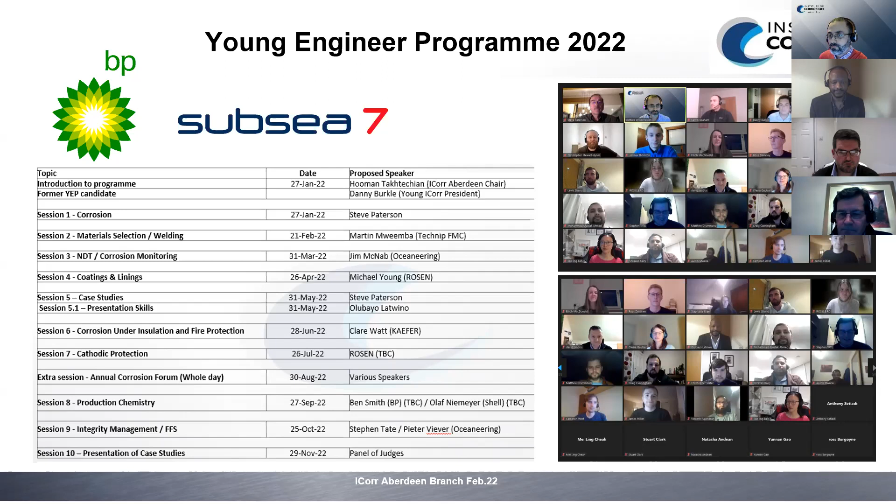But before that, just an introduction to our speaker today, and Andy, who is supporting him during the question and answer session. So Leo is a principal engineer in the production chemistry department within Intertek's production and integrity assurance group. He has worked in industry for over 13 years, working on a wide variety of oil and gas projects, including microbial souring investigations and mitigation laboratory studies, system assessment for carbon capture and sequestration projects, chemical treatment and corrosion studies for large seawater injection systems, and operational and corrosion management systems reviews. Leo gained his bachelor degree in chemistry from the University of Sheffield in 2006.

And Andy Duncan, who is a lead consultant with Intertek Production and Integrity Assurance, is a chartered engineer and a fellow of the Institute of Corrosion with 40 years experience in oil and gas, refining and petrochemical industries across some 20 countries. Prior to joining Intertek P&IA 6 years ago, he worked for BP, Associated Octel, Capcis, and the UK Health and Safety Executive, where he led the external corrosion project and the key program for KP4 on aging and life extension of offshore oil and gas production facilities. Andy is a member of the IOM3 Energy Transition Group, the IOM3 Corrosion Group, and also the Energy Institute Corrosion Management Committee. Andy is active in mentoring engineers and scientists of the future inside and outside of Intertek.

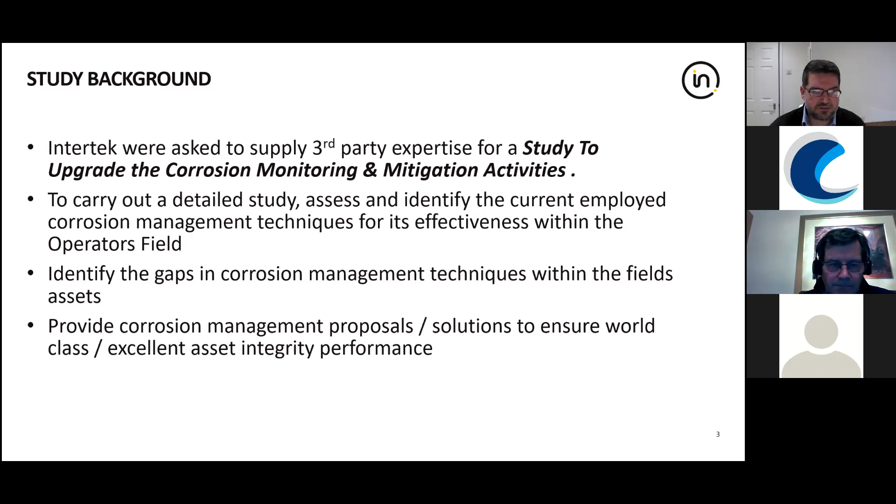The study was broken into two main sections. First was a document review, which was both desktop based in the UK and also within the client's offices. When requesting data, initially you get a large amount coming through, but we typically see in projects that getting the last few bits of data—due to different nomenclature, people referring to things in different ways—actually being in the office and doing the paper following to get that information can really help push forward the study.

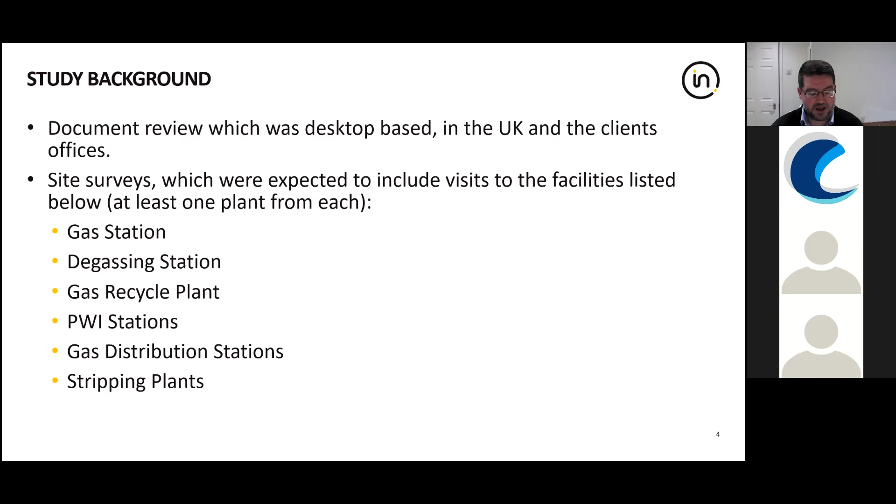There was also the site element to it. We attended various parts of the field's production system—this was a gas well, but they produce all sorts of fluids: gas, gas condensate production, as well as black oil. So a variety of different stations: gas stations, degassing stations, gas recycling plants, produced water injection stations, gas distribution, as well as stripping plants. We were looking at all of these different process types and how the corrosion management mitigation documents apply to each of them.

The wording of the proposal and the report said that the purpose of the site visit was to gain an understanding of the integrity management activities, the corrosion control monitoring and mitigation programs, and also look at repairs—as often repairs, especially temporary ones, can be implemented, and then 3-4 years later you find they're still there but listed under temporary repairs and not moved on to fully permanent repairs.

And also while on site, to determine the current and projected process conditions—that's to help determine whether the corrosion management document as is would be suitable as the life of the field progresses and the composition of the fluids, etc., changes, and to make sure that the system was able to handle any future operational conditions.

Also part of that, we needed to look at the fluid compositional data—not actually performing the samples, but to see what sort of measurements and monitoring the operator was doing on that side of things. Looking at the chemicals being dosed to address the various corrosion issues they had, and also looking at the materials of construction—making sure that what they were saying they were using was actually what was there, and in places where high alloys are used, that's actually what was in place, and that they're using materials of construction as a method of corrosion mitigation.

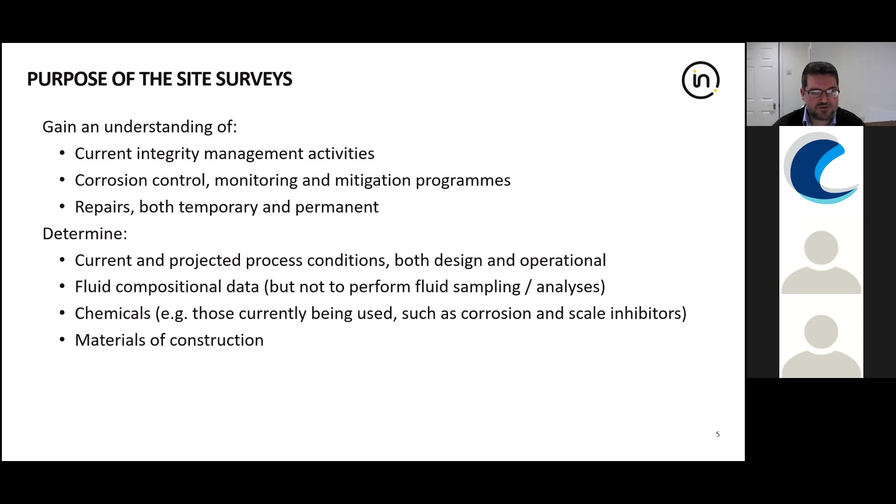That was on paper what the purpose of the site visit was for, but really the critical thing we took from the site visit was to actually talk to the operators and personnel at site. The amount of information we were looking through ultimately didn't matter if you got to site and found out that they'd never used that document you reviewed, or it's a different version, or that part of the process no longer exists. So actually getting to site and talking with the people to determine what was going on was key—on paper everything could have looked perfect, but when you get there, you can find it was very different to what your understanding was before you got there.

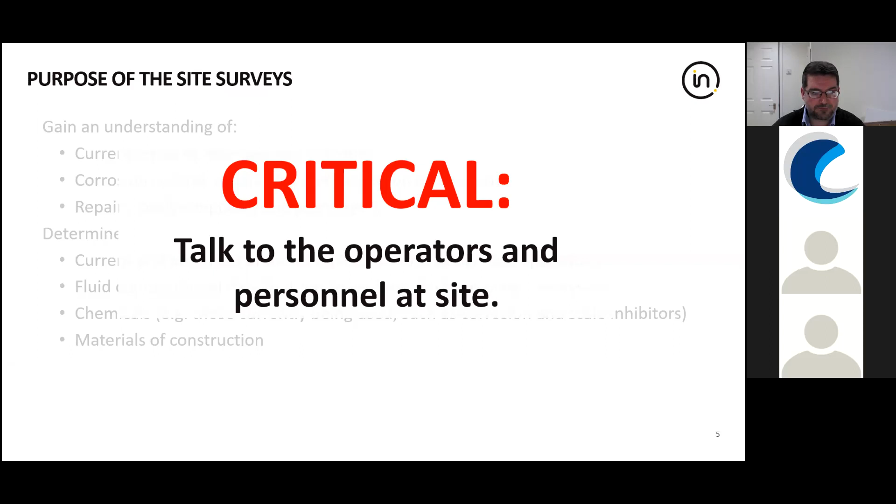So how do we go about the study? The basis of the study was the implementation of the guidance within HSG 65. HSG 65 is an HSE document which could be used to assess the effectiveness of any organisation which relies on systems, procedures and methodologies, and organisations that are required to operate in a safe and effective manner.

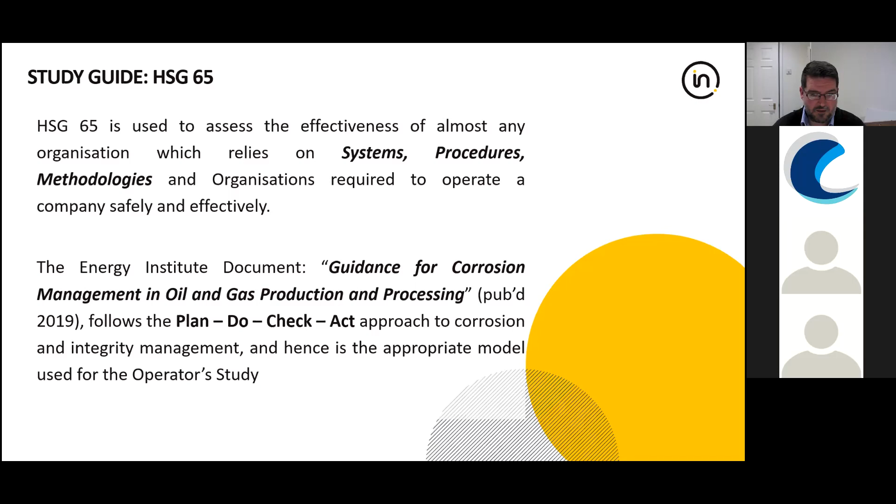This tied in quite nicely with a review of the corrosion mitigation aspects, as the Energy Institute's guidance for corrosion management in oil and gas production and processing follows this plan-do-check-act methodology, which is highlighted in HSG 65. So we looked at applying that across the various monitoring and mitigation processes that the operator did.

Starting with the planning, the input into that is first of all policies - what documentation, what guidelines are there within the organisation. This is quite high level, so the health and safety policy, company mission statements, and other corporate policies, alongside the actual planning of the action or system that you're reviewing.

So looking at what's going to be physically going on, who needs to be there, what's going to be done - so who, what, why, when, how. Planning what teams are needed, when it's going to be done, what's going to actually go, and also why - does it have to be done, is it critical that it's done at that point. A lot of these actions have a risk associated with them, so making sure that it's justified to do that action is key.

So once the plan's in place, you can go to actually implementing your plan, the do part of it. This is everything from organising the team, making sure there's nothing within the action that could be hazardous, making sure the right people are there with the right equipment, etc., and getting the task done as safely as possible.

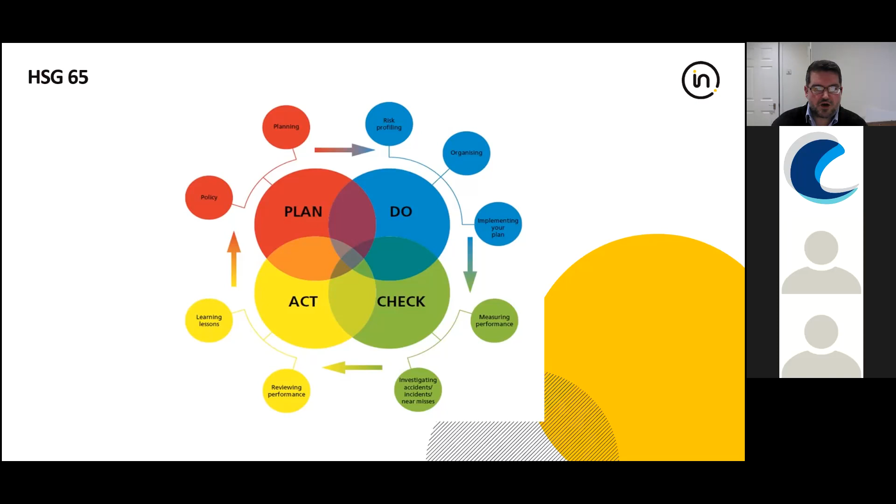So applying this to the corrosion mitigation and monitoring activities done at the operator's field, we followed the same sort of circular review. Initially a review of the corrosion monitoring and mitigation documents, and that intertwined with interviews with corrosion engineers, lab personnel, people actually doing the work.

Then we looked at the reporting practices and pathways - so what happens when they've got the information, where does that go? And then review of the higher document, the corrosion management policy, to see what the general ethos is behind what they're trying to achieve and how they're trying to do it.

So within this, this wasn't hard and fast, but to fit this into the Plan, Do, Check, Act, we assigned the overlap between the review. The do part of it was what happens when they take the monitoring mitigation plan and actually put it in the field, and that information comes from review of the documents as well as interviews with the people who actually go do it.

The check part was following discussion with the people and seeing what the results were gained and how that was inputted. The Act was based upon once the information was put into the system, how does that feed back into the corrosion management policy? And then the corrosion management policy fits in with the monitoring and mitigation documents for a plan of how they're addressing the various corrosion issues on site.

Within the study itself, there were numerous topics covered. On the corrosion monitoring side, we looked at intrusive corrosion monitoring, deposit analysis, and scaling tendency, which, while not directly associated with corrosion, has the potential for under-deposit corrosion, so that was included. Microbiological assessment looked at the potential for MIC within the system and how that was being assessed.

We looked at all sorts of different plants. Many systems had cooling water and glycol systems as well, so we looked at the quality of both cooling water and glycol. A lot of the systems were coated, and a lot operated at elevated or depressed temperatures, so much of the system was insulated. We looked at corrosion under insulation and what was being done to ensure that wasn't an issue.

We also looked at the lab procedures, documents and reporting to determine whether the sample analysis being done was supplying the quality of information needed to make decisions for mitigation.

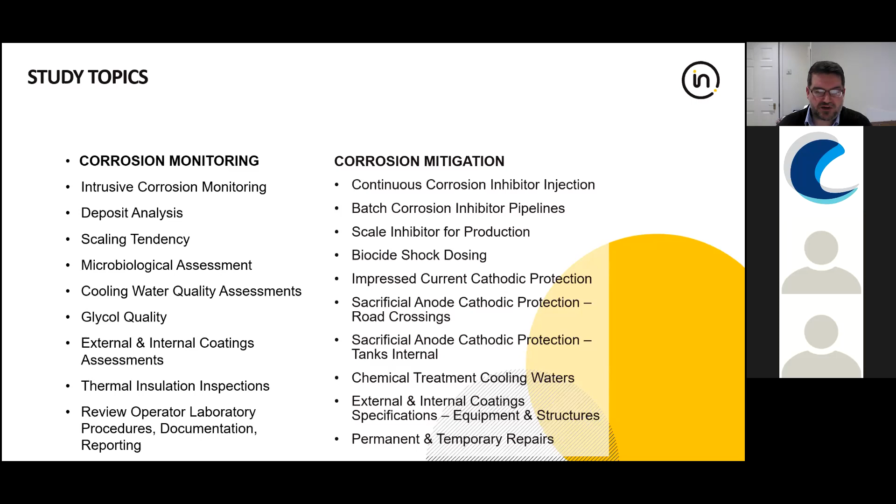When it came to mitigation, we assessed the policy for continuous corrosion inhibitor injection as well as batch corrosion inhibitor injection, and looked at scale inhibitor and biocide shock or batch dosing. We looked at a lot of the impressed current cathodic protection systems, as well as sacrificial anodes for road crossings and tank internals, the chemical treatment for cooling waters, the external and internal coating specifications for equipment and structures, and also what's done regarding permanent and temporary repairs.

These are all the topics which basically feed the technical basis of the corrosion management policy. All of these sit within the Plan part, and all the information feeds back into the overall overarching corrosion management policy. That's where the Act part of the circle feeds back in.

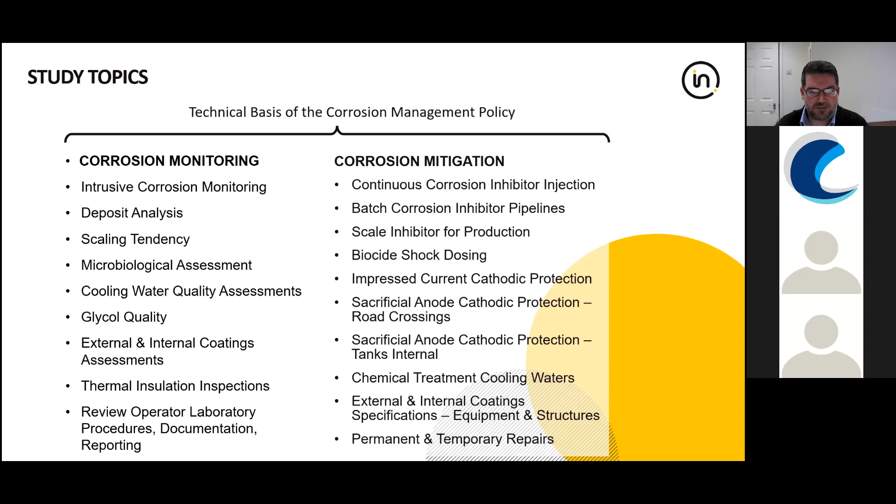So overall, the study outcomes. When we looked at breaking down the outcomes of the study, we started at a very high level and worked our way down into the individual processes and procedures the operator was utilizing. Overall, we had the traffic light system: green meets the standard, amber needs improvement, and red means significant improvement is required.

Starting with the overall planning aspect, a lot of the procedures and policies were good. There were some technical and documentational improvements required, but overall it was a good standard.

The Do part of the implementation: overall, all the staff were professional and delivered in a timely manner. However, a lot of the actions were taken on calendar-based schedules, with no risk associated with what they were doing. So inspections, etc., weren't done on a risk-based schedule.

Going on to Check and Act, both of these overall needed significant improvement. Once they planned what they were doing, they went out and did it, but after that the information or review stopped there. The information was uploaded to spreadsheets and databases, with no further follow-on from that.

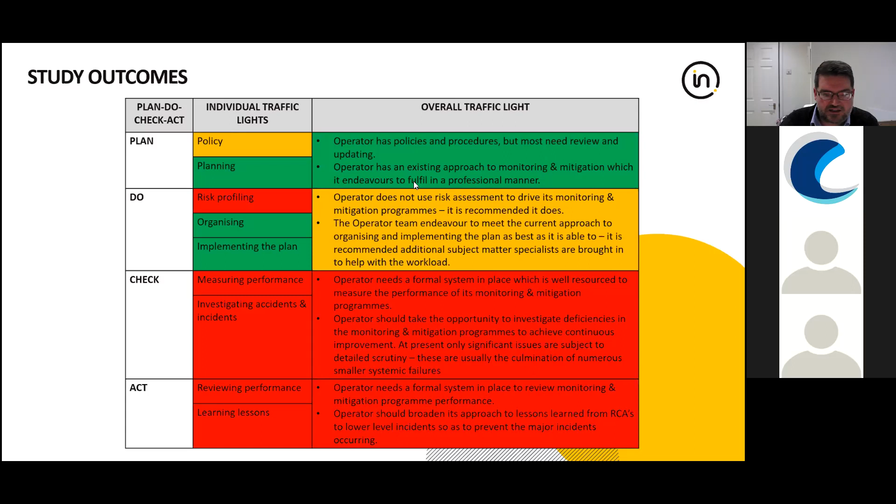So to say, with regards to corrosion monitoring and corrosion mitigation, there were numerous topics which we looked at addressing, but for the next few slides I'll just focus on two of the corrosion monitoring and two of the corrosion mitigation. So look at the intrusive corrosion monitoring, ER probes, corrosion coupons, etc., and the external and internal coating assessment.

And then for the mitigation, we'll look at the differences between the application of continuous corrosion inhibitor versus the batch corrosion inhibitor that was deployed at the site.

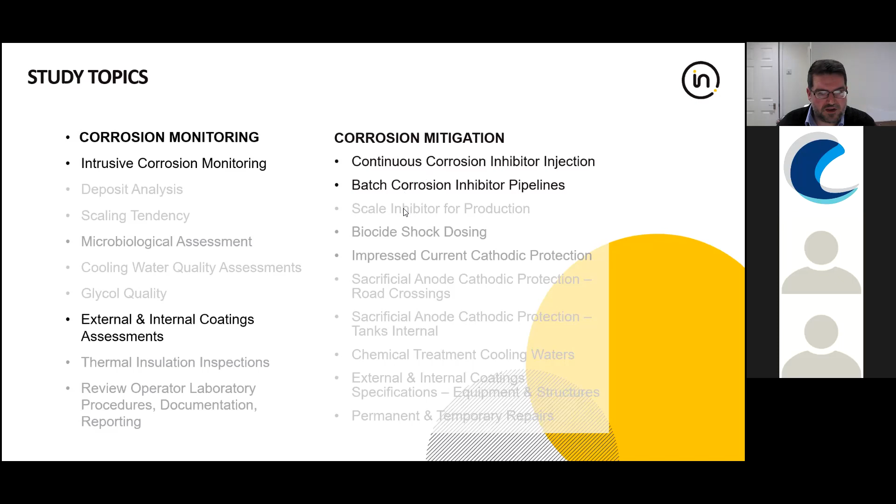So for corrosion monitoring, again the planning and the doing - in this case the check part of the program was there. The planning part was overall well done. There were well-written standards, overdue for review, with some minor technical errors.

The planning for the retrievals and probe readings were well planned. However, a few minor things: there was no tag numbers on the intrusive corrosion monitoring points in the field, and there was a lot of data knocking about on various systems. There was no centralized management software.

And again, the risk profiling - in every topic that we reviewed had the issue that it wasn't based on risk, it was just based on opportunity or a calendar basis, so there's potential to optimize the retrievals. But overall, the organization was very effective, and the implementation of the plan was very effective.

But there was a need for a central support function to make sure that the team could keep delivering that high level of quality. As for measuring performance, without a centralized system there was no way of correlating what you're seeing.

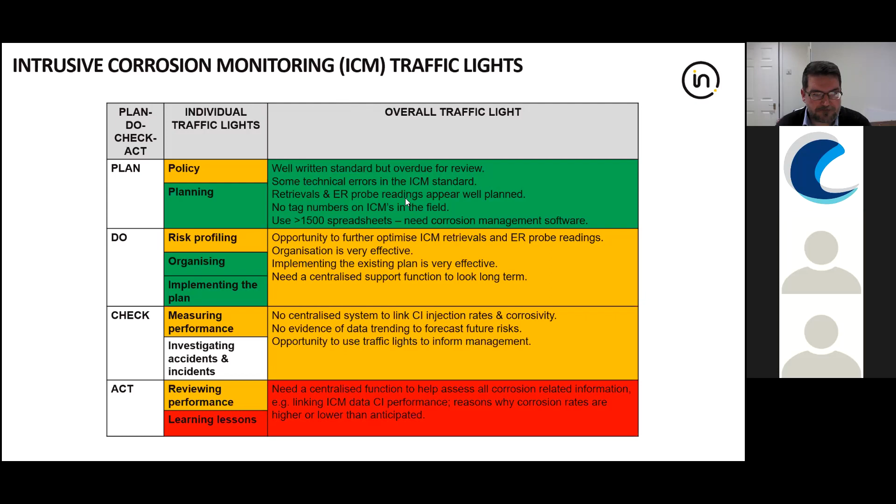Now, this is one of the key takeaways that we were a bit taken aback by - the fact that there was primarily one corrosion technician who was responsible for the maintenance and operation of over 1,500 spreadsheets.

So this poor chap - how they ever let him go on holiday, I don't know - because everything was kept in his head and on his computer. So that was really highlighted as an issue that could both streamline what they were doing and also allow them to get a much better idea of what was going on within the field.

So just the recommendations: trending recommendations were made across the field. Plan the retrievals and readings based on corrosion risk, and link the retrievals to corrosion inhibitor injection rates, performance, NDT data, etc.

One of the things we saw from a practical point of view was that the corrosion coupon fittings were just a dust cap rather than a cap fitted with a bleed valve and pressure gauge to indicate if there was any issue behind the cap.

Review of the standard, although it was overall quite good. The retrieval procedure should be followed at all times, and by that we mean discussion with the people in the field.

When we talk about the coupon retrieval, we asked how do you pressurize up the device, and we got the correct answer. However, we knew that wasn't always the truth all the time. We suspect that they sometimes pressurized up off the line rather than using the external pump as they should have done.

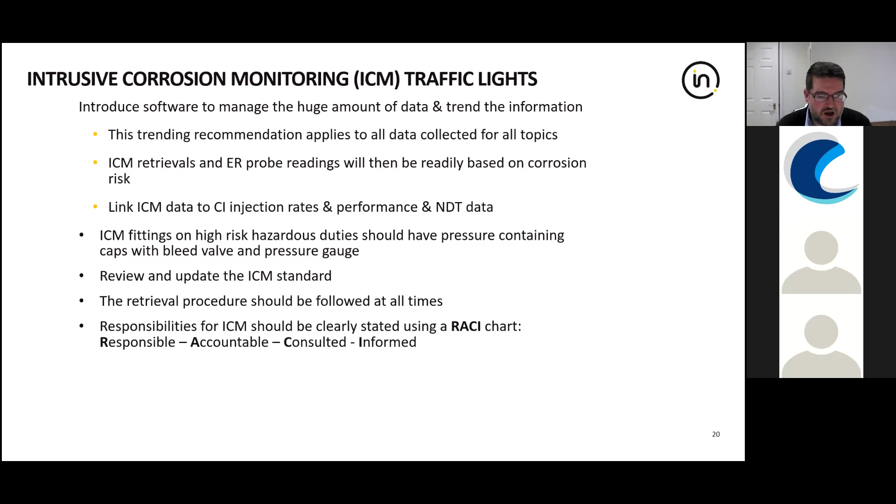One of the other key factors we identified is that, in order to help delegate and spread some of the responsibilities, the creation of RACI charts - responsible, accountable, consulted, informed - would greatly help the corrosion team as a whole. So for those who don't know, responsible is who actually does the action, who collects the corrosion measurements, who conducts the analysis, who updates, etc. Accountable is the person whose job it is to make sure the work is done. Consulted are the people who can help input into making sure the work's done, technical specialists, consultants, etc. And the informed person is the person who has overview and checks that the task is done.

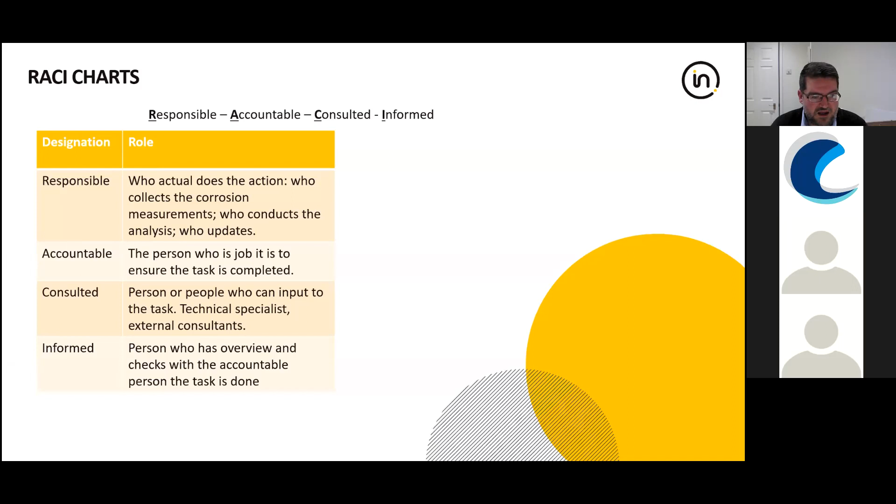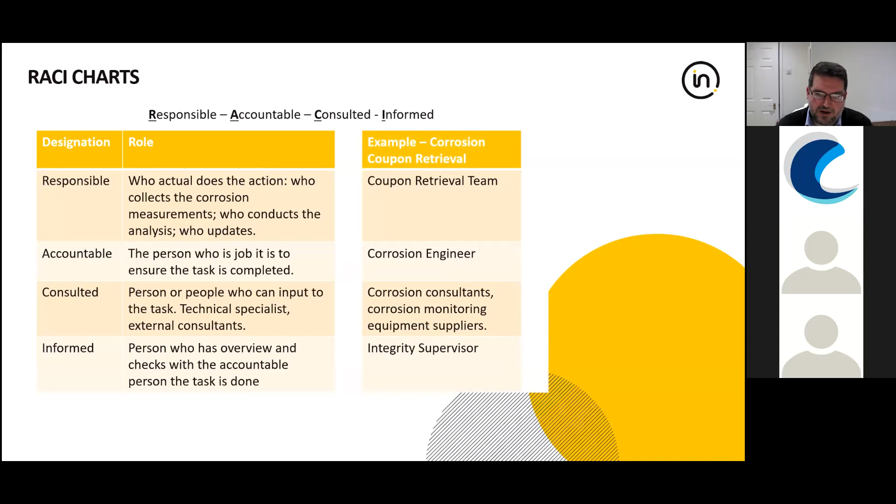So an example of this is the corrosion coupon retrieval. Who's responsible for it? The coupon retrieval team. And that's been driven by the accountable person, who's the corrosion engineer. Between them, they can consult with corrosion consultants, corrosion monitoring equipment suppliers, maintenance departments, etc. And overall, the integrity supervisor is the one who makes sure it's going ahead. Now obviously the names and terms used will vary from organisation to organisation, but this just gives an idea, and it also shows how you can use this to go from one task to the next.

So following the coupon retrieval, you'd be looking at coupon examination. So they've gone to the effort, they've got the coupon out - now who's responsible for what happens next? Responsible is to make sure the weight loss analysis is done. The corrosion laboratory technician is assigned that task. The lab supervisor is the person who needs to make sure the task is complete.

They again can consult with the corrosion engineers, equipment suppliers, maintenance, etc., whoever needs to. And ultimately, this information is for the corrosion engineer to input into his system, so he's the one who needs to be kept informed of what's going on.

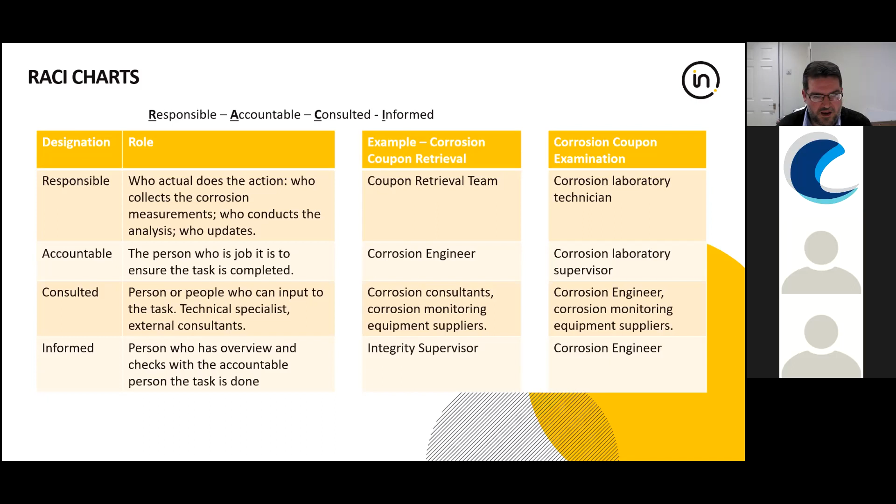So the application of RACI charts allows the right people to be doing the right job, and allows people to identify when they're able just to get on with the job, rather than the methodology employed by the operator, which was very fluid and things weren't definitively assigned. So we thought this would be a good thing for them to take forward and push forward, and help streamline how the processes were delivered.

So moving on to the external and internal coating - here the planning section achieved amber. There were specifications, but they were overdue and referred to outdated standards. There was very little in the way of technical detail, and no detail on inspection methods, criteria, and acceptance levels.

As I mentioned before, across the board, risk profiling was red - it was either time-based or opportunistically based. But again, the people doing the work, when asked, were competent, professional, and effective. But again, once the information was gained, there was very little done with it.

There was no evidence that it was fed back into the procedure, no evidence of formal investigations, and the only record really was of repairs. But having said that, the coatings that were observed appeared to be in good condition - but that's just a tiny percentage of the overall system. So there needs to be something formalised and implemented, and again, if you're not checking, then you can't act on that and can't complete the feedback loop.

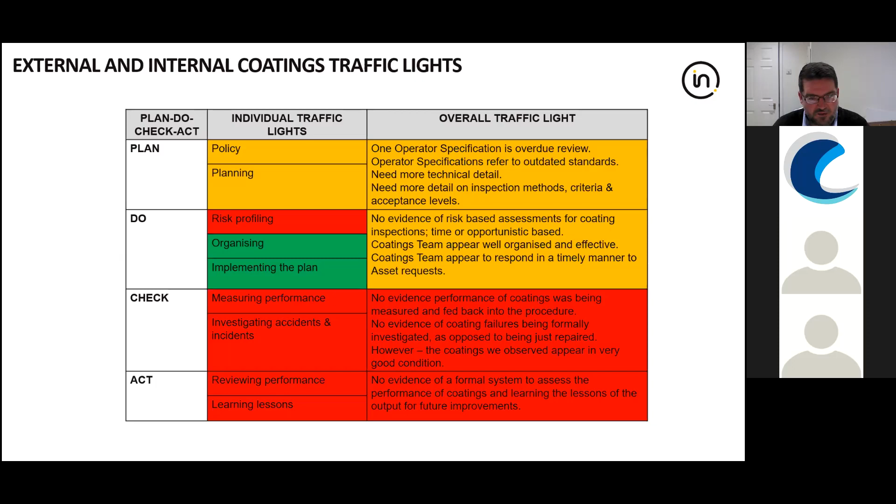So the recommendations were basically a whole-scale refurbishment or revision of what they were doing - update, revise, and expand the inspection documents, and separate out the requirements when it comes to new build of plant versus maintenance of existing, as they're both currently addressed by the same standard.

The inspection should be based upon actual predicted or perceived degradation mechanisms - corrosion under pipe supports, fretting under pipe supports - things you may walk past on a daily basis, but actually take a step back and realise, okay, that could be an issue. We do need to check on it, be it once a month or once a year, but as long as it's identified.

With all of the data that was gathered, there was the need to trend it and identify the likelihood of non-conformance and optimise inspection schedules, because any data that was gathered wasn't used to help with that. So there were a lot of people potentially doing a lot of work that didn't need to be done. Further from that, the creation of RACI charts for all of these systems would really help to streamline things.

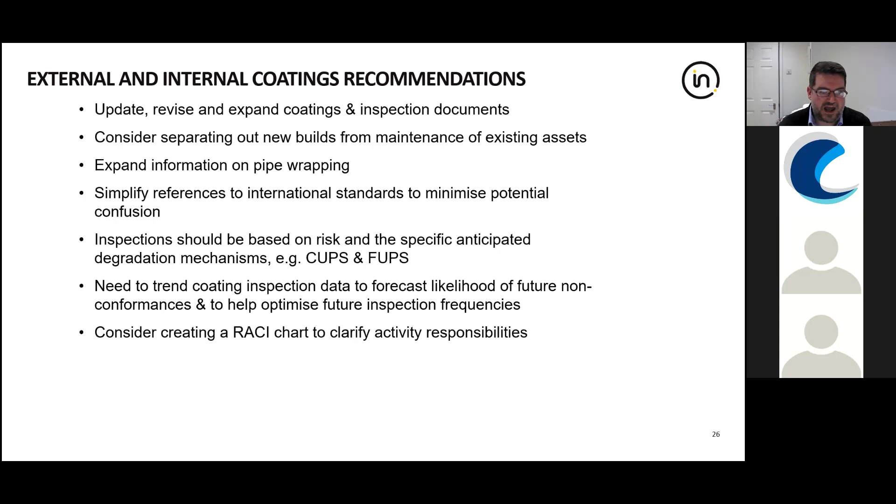So on the corrosion mitigation side, we looked at how they're dosing corrosion inhibitor in two different ways: continuously and as a batch dose treatment.

On the planning side, there was very little - the planning side overall was rated as red. There was a lot of reliance on what the vendors were telling them to do, with no independent confirmation of the corrosion inhibitor performance. That also tied in with field trials and testing of corrosion inhibitor under pipeline conditions. Basically, the reason the corrosion inhibitor was dosed at the concentration and location was purely based upon where the vendor said the chemical should go in.

There were also cases where oil-soluble corrosion inhibitors were being injected into gas lines with low water cuts. As far as we could understand, there was no credible basis for why that particular chemical should be used in that situation. So there was very much a lead from the chemical company, and they needed to challenge and start to understand why they were doing what they were doing and where.

On the 'do' part, again, no risk profiling - they were putting it into all pipelines because they were under the impression they should. For example, pipelines with dew points of -27 were being dosed in almost the same manner as wet gas pipelines. So there was a need for them to understand what they were doing and why.

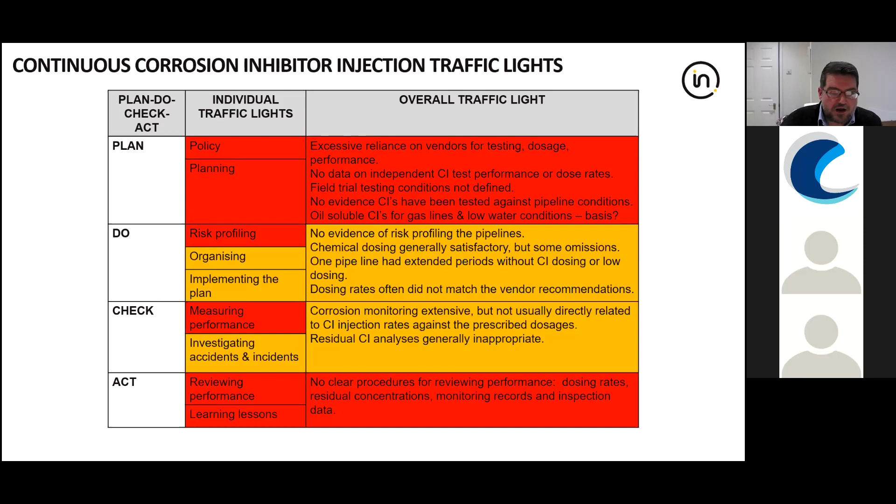From the Act point of view, there was no procedure for reviewing the performance. There was no tying everything together - no lessons learned, nothing being taken forward on the back of it.

With the recommendations, we strongly recommended there be a more stringent understanding of why, where, and how they were dosing the chemicals - get the vendor to fully explain the basis for dosing the chemicals, where and how. Also determine whether, because a lot of the chemicals being dosed were still the same chemicals selected 5-10 years before, the technology or the systems have moved on - are those chemicals still relevant for the fluids they were aiming to treat?

There was no independent testing of the dosing rates - although there was an internal standard that the operator had, it was not actually used. It was purely based on what the vendors were recommending, and that wasn't necessarily based on the actual pipeline conditions. As discussed before, the corrosion inhibitor injection needs to be tied in with the observed corrosion rates and adjusted accordingly, also based on production. If wells are being turned on and off and flow rates are changing dramatically, that needs to be taken into account in the injection rate.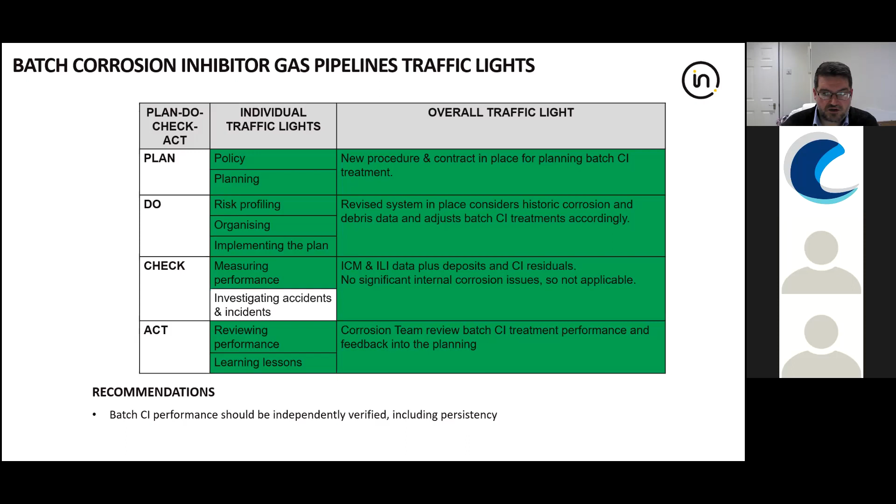So in summary, on the corrosion monitoring, there's an obvious theme where the planning and doing were adequate but needed improvement. But once you got to the check and the ACT parts, there was basically nothing implemented there to close the loop.

The checking based on the data wasn't conducted, and therefore there was very little to act on. Now, there was obviously a place for improvement if they started to focus on the check and act and close the feedback loop.

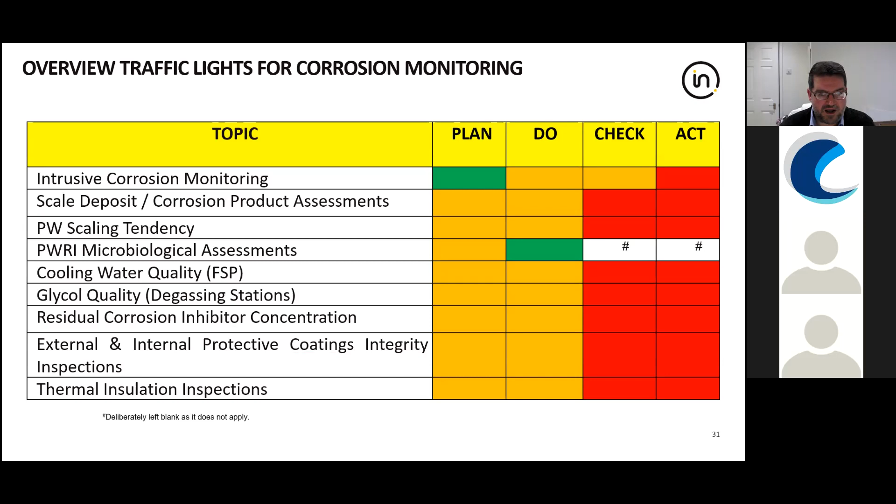With regards to the mitigation, there were a few key areas where they had very little experience and very little knowledge, and that shone through.

So this scale inhibition - scale was dealt with by the corrosion department, who weren't particularly technically strong in that area, and so that part was basically ignored and just followed vendor recommended practices.

Again, same with the biocide shock dosing. There was a lack of understanding in regards to what was required there, and therefore, from the very early stages of planning and doing, there was a lot of improvement needed across the board.

And finally, temporary defined life repairs. There was very little information on that, and as I said at the start, some temporary repairs were about 4 years past being temporary. So there was a lot of work required there to try and get that system up to speed.

So it's quite a bit more varied on the mitigation, which primarily probably comes down to the requirement for more people and a better system to correlate the information, because that's key. If they don't know what's going in and where it's going in and how that's affecting the system, then they're not going to be able to optimize this.

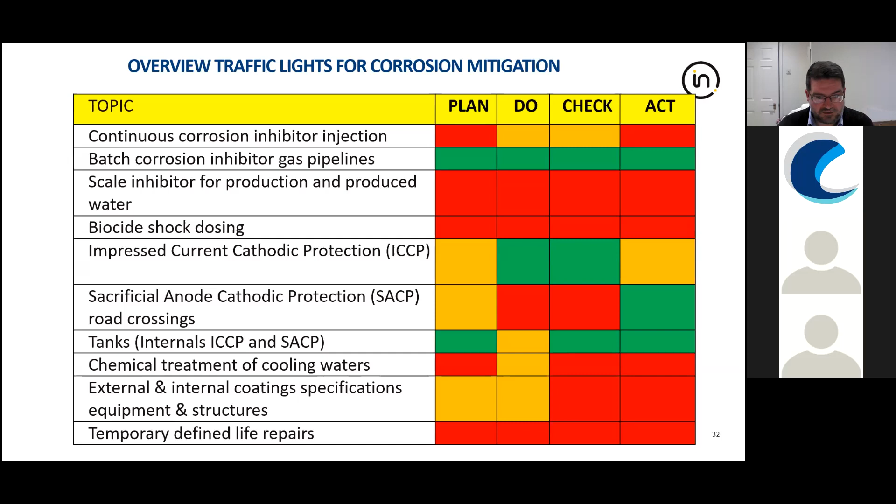So that was a big take-home finding from the study, that they need to really, when they generate the data, to basically use it.

So this is an additional slide which we've added just for discussion. This study was conducted back in 2019, before everything became very, very different.

Obviously the world changed a lot over the last 2 years, changed the working patterns, project delivery, moved towards remote and automated inspection and monitoring, reduced personnel on board and offshore platforms, etc., trying to minimize interaction. So what does that mean with regards to the application of Plan, Do, Check, Act within corrosion monitoring and mitigation?

If that's the way things start to go forward, then the planning stage of these becomes even more important. Because if the planning's wrong and the wrong thing is planned for, then the automation is basically pointless - with any automated system, there's garbage in, garbage out. If you're monitoring corrosion rates by in-place sensors, various monitoring equipment, probes, etc., and the plan at the very start has the sensors not in the correct place, so if they're not focusing on where you're most likely to have corrosion, or even slightly out of place, the information they gather doesn't tell you anything about what's going on.

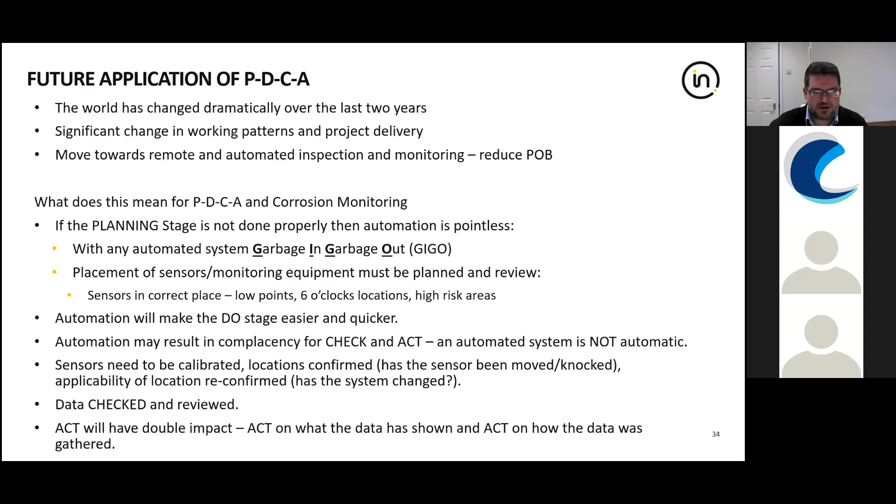Thank you very much for that, Leo. That was an excellent presentation, lots of detail. So, as Leo said, if anyone's got any questions, if you could put them up, and we'll start going through them. So, first one here is relating to the initial criteria that you put up.

What was the benchmark / criteria to classify the Plan, Do, Check, Act as meeting or needing improvements?

They're based on our own internal expertise and also international knowledge. So for example, the Energy Institute documents, which give a lot of information on things like corrosion in oil and gas production systems - we use those as the basis of that. Those are the things, that's what you're trying to achieve, and then assess how they were trying to get to that point, if they were getting to that point. So we're using a lot of international standards, also industry standards. Yeah, so that was really the basis.